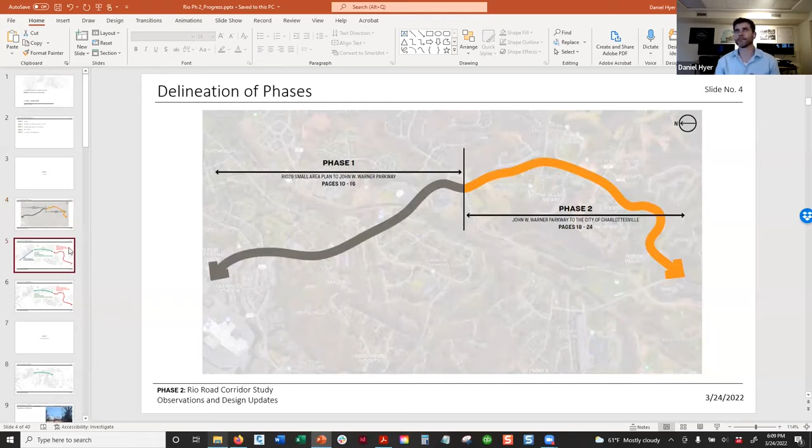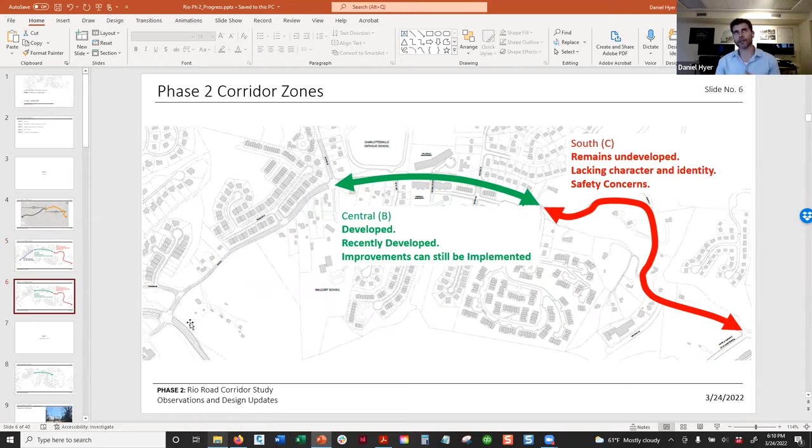Again, phase 2 is tonight. That's the orange part of this map. So that's from John Warner Parkway south to the city line. And within phase 2, we have organized the corridor into 3 zones: north, central, and south. This is just a brief recap of that organization. Tonight, we're talking about primarily central and south in terms of background data, but then we'll bring the north section back in when we talk about proposed concepts.

Since we last talked, we've done a deep dive into the central and southern portions of the corridor. There's a lot happening and there's a lot to talk about. We wanted to understand what's happening, what has happened, what will be happening. We wanted to identify deficiencies and safety concerns, and understand those so that our proposed solutions can address those items.

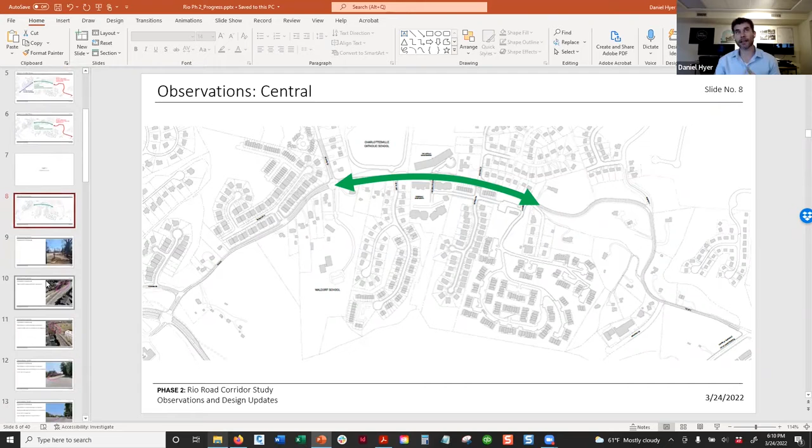I've gone with a slightly different format tonight in how I introduce that, going more photographic than anything, so you can see what I'm talking about.

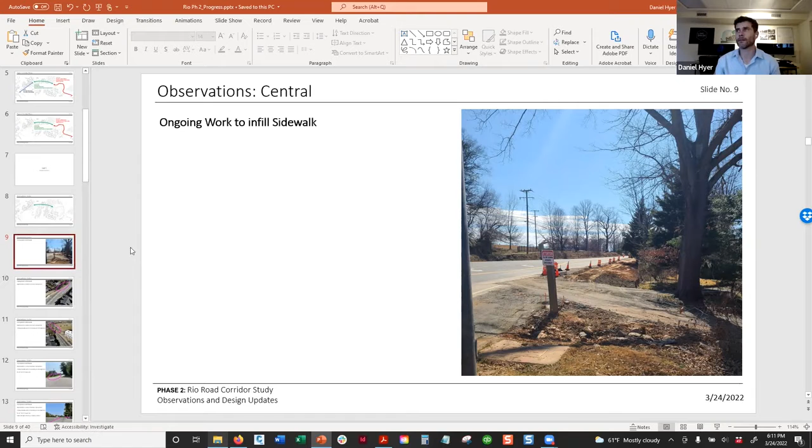Obviously, in the central section, like the north section, there's ongoing work. There's improvements happening. You've probably noticed this or been waiting in a longer queue of cars than normal as a construction flagger is out in the roadway. So there's work happening in the central section now, currently.

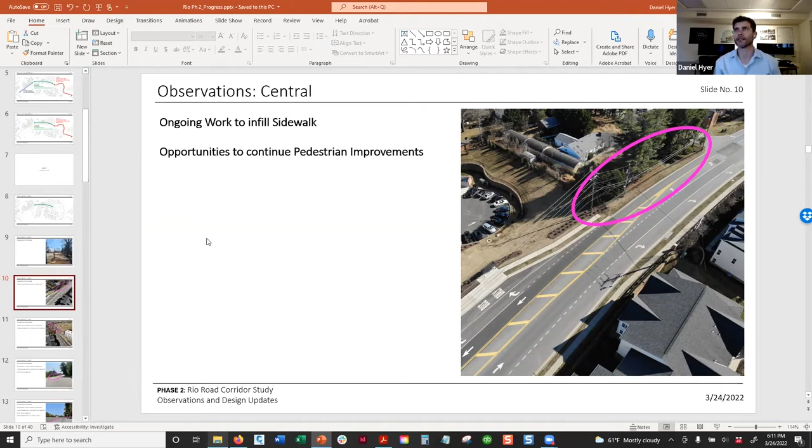But even though the county is currently infilling the sidewalk, even when they're done with that, there's still going to be portions of this part of the corridor that are still lacking just basic pedestrian amenities. We're getting better, but we still have work to do.

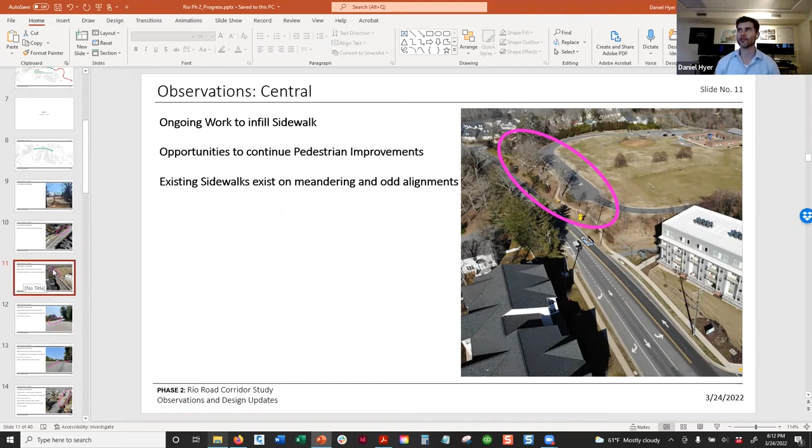Some of the pedestrian facilities we have specifically have weird alignments. If you recall the sidewalk in front of the Catholic school, we observed what's kind of a strange phenomenon with how the sidewalk meanders through the trees. Don't get me wrong, I think it's very lovely and nice, but it is an interesting attribute of this corridor. It's relatively atypical when you talk about pedestrian facilities within a public transportation corridor. So that's a unique item, and we're going to come back to that a little later.

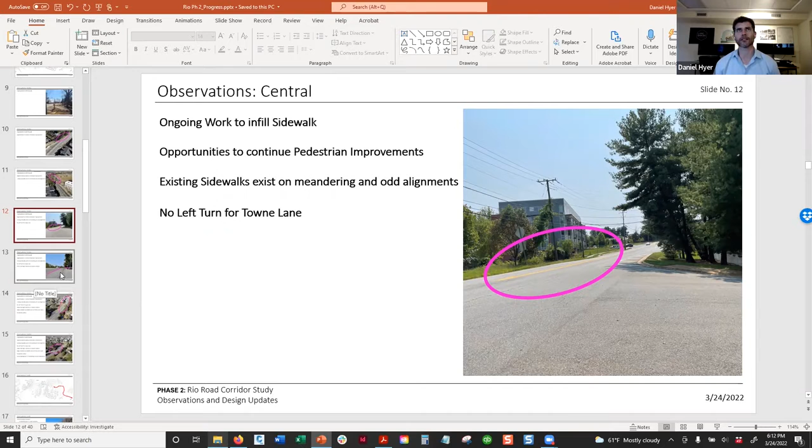Interestingly enough, there's not a left-hand turn at Towne Lane, which we think is an interesting attribute of the corridor, especially since there's so many turn lanes in the corridor, both right-hand and left-hand, and that this is just notably absent. We took note of that, and I do believe, though I might get this wrong, that a turn lane is warranted there, at least based on our initial assumptions and calculations. So there should be a left-hand turn lane at Towne Lane.

The central section is the first bit of the roadway where we've specifically identified some very quantifiable sight distance challenges, both on the vertical roadway line and horizontally. This car is shown here in this picture. If you've actually turned off of Penn Park Lane onto Rio, it is visually challenged. The sight distances are challenged and obstructed.

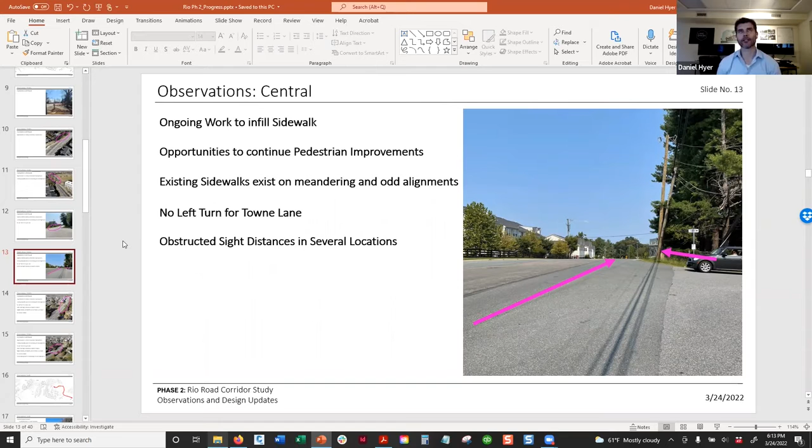Interestingly enough, the vertical geometry of the roadway also provides unique obstructions. There's a vertical curve here at this intersection, so the road has a curve like my hands are showing, and it's not the right vertical curvature for the speed limit of the roadway. So we'll come back to that as well.

Another very interesting attribute of the central section of this roadway is that the lane widths are highly variable. We're seeing a lot of inconsistencies with the widths available for vehicles to travel, which is an opportunity for us as we think about what we can fit into this roadway and what we should do with the space we have. In some ways it's a luxury to have some extra lane width, but we have lanes as wide as 14 feet next to lanes as narrow as 11 feet. So there's a disparity in how the asphalt is being organized and the space is being used.

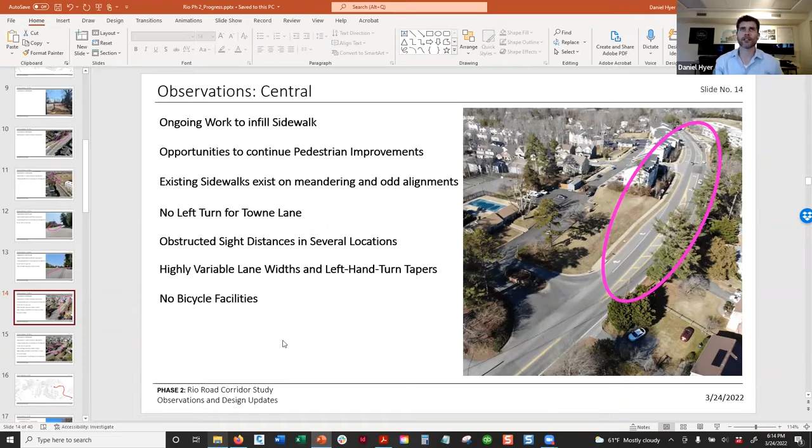It's also interesting to note that there are no bicycle facilities along this portion of the road.

Finally, here at the southern end of the central section, the entrances for Stonehenge and Rockbrook Drive pose a very interesting challenge in terms of access management and really safety for that matter. There's a number of accidents that have been recorded right here. If you're actually trying to know what's going on at that intersection—although it should be two intersections, but I'm just going to call it one ambiguous intersection—it's not hard to imagine that it's a little confusing what to do there. If you're a new driver, even an experienced driver, it's not exactly clear how vehicles should be interacting with each other at that intersection.

So those are just general observations of ours, or some of the most noteworthy ones of the central section of this corridor. I'm going to keep moving through my observations down into the southern portion of the corridor, and then we'll come back through everything.

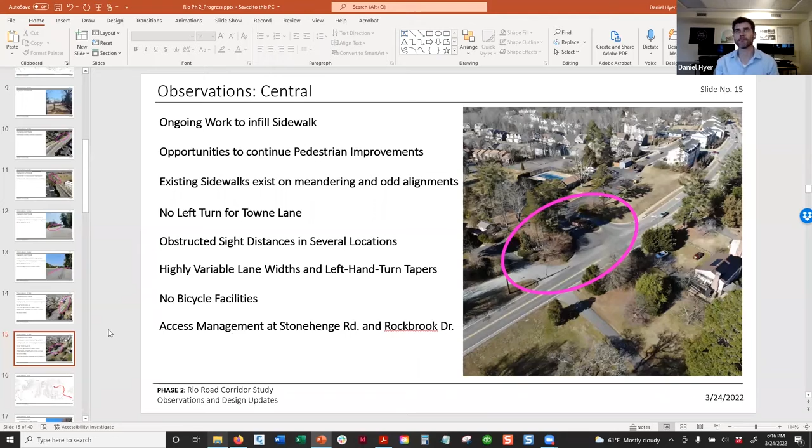The south section, this is really where it starts. If the central section is interesting, the southern becomes immensely interesting. There's just this almost unraveling of safety and predictability the further south you go on Rio Road.

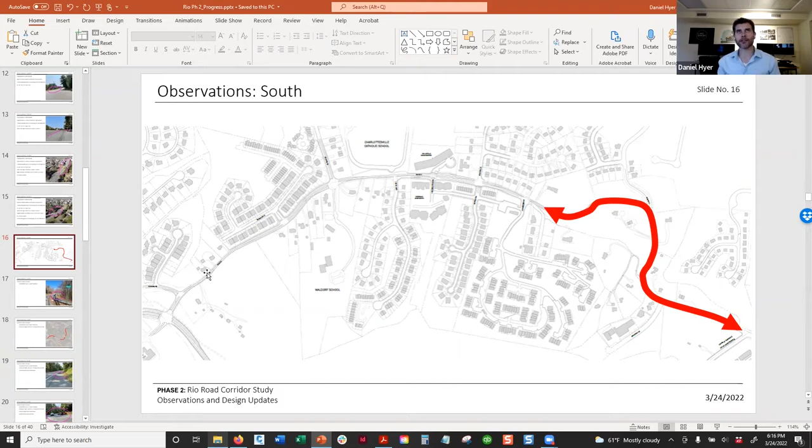Interesting to note, not only has the guardrail been hit some number of times in some number of locations along this portion of the roadway, the current guardrail is not up to current standards. We've observed that deficiency, and we'll be certainly making some comment about it. The guardrail's there because this roadway is more or less carved along a slope, so you have very constrained conditions on both sides of the roadway. Really any improvements you'd want to make are rather constrained on the transverse axis of the road.

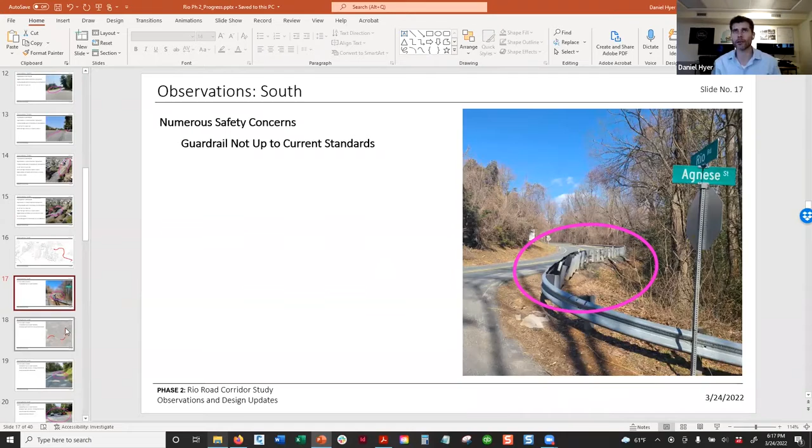Another interesting thing to note about this portion of the corridor is that a lot of these hairpin turns don't allow for adequate sight distance along the roadway. And that's further compounded as a result of the turning radii along these curves being too small for what the speed along this roadway is. And so you can start to see, and you're only going to see it more as I continue to go on, the challenges in the southern portion of this corridor start to just compound.

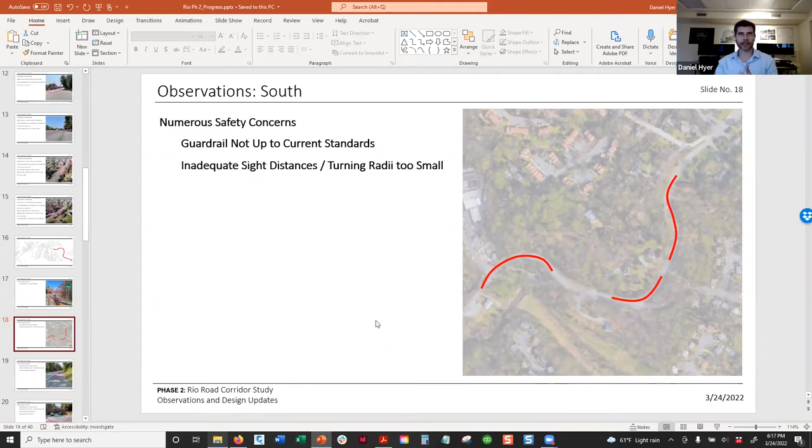So we have inadequate sight distance, we have turning radius too small, we have guardrails that are not up to current code. And then we start to have these strange spaces along the roadway where, and I know that all of you have experienced this, you have extra pavement that you're not even really sure why it's there, but it's there, and then there's vegetation growing into the road, and then there's drainage inlets occasionally, and there's a lot of cracking, potholes. It's just kind of this strange roadway shoulder, right?

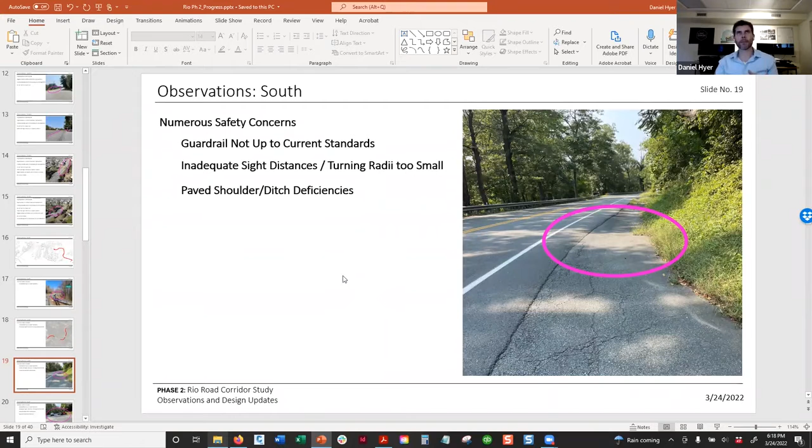And then I know everyone's probably experienced this. You see someone who wants to make a left-hand turn onto Agnese Street, which takes you into the city up to Locust Avenue. And because the pavement markings are lacking in their clarity, and because the roadway is sufficiently wide due to that paved shoulder we just looked at, you start to see cars doing things like that red truck is doing, where you have a car waiting to make a left-hand turn, but they can't see far enough down the roadway to see if the turn is clear.

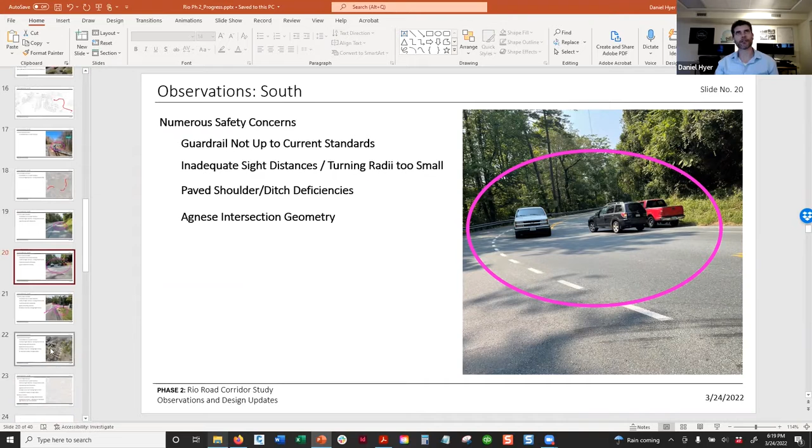So they continue to pull forward farther than they probably would just to see if they can get the sight distance for a safe turn. Meanwhile, in doing that, they've created a space for a car to go around them on the right, which is really driving on the shoulder or ditch or, you know, unintentional drivable surface. And so we see a lot of challenge here at this Agnese intersection because of all of these deficiencies. And the deficiencies continue along the road.

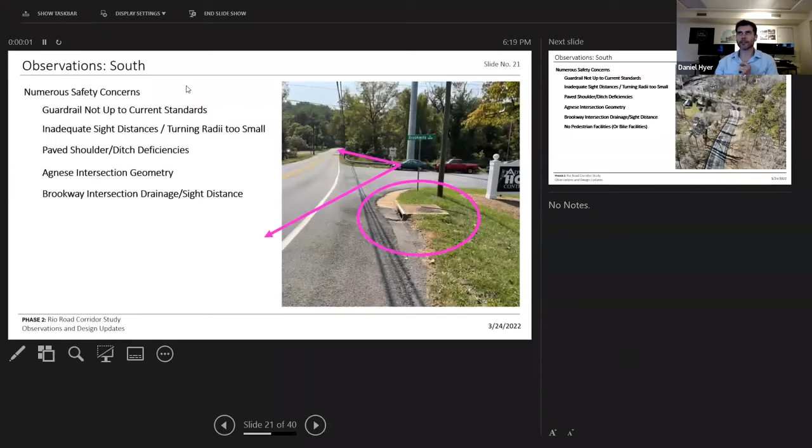Yeah, David. Yeah, I'm sorry. Sorry to interrupt your flow. Can you click on slideshow? It might be a little bit easier to see if the screen was bigger. I was thinking about that, David, but it kind of takes over. Oh, okay. PowerPoint punches me in the face when I try to do that. So okay. Well, I'm sorry. Then go ahead. Yeah. No, go ahead. If anyone is having trouble seeing things, I'll certainly come back and zoom in for you. I apologize if it's too small. And if you're watching on an iPhone, that's probably even harder yet.

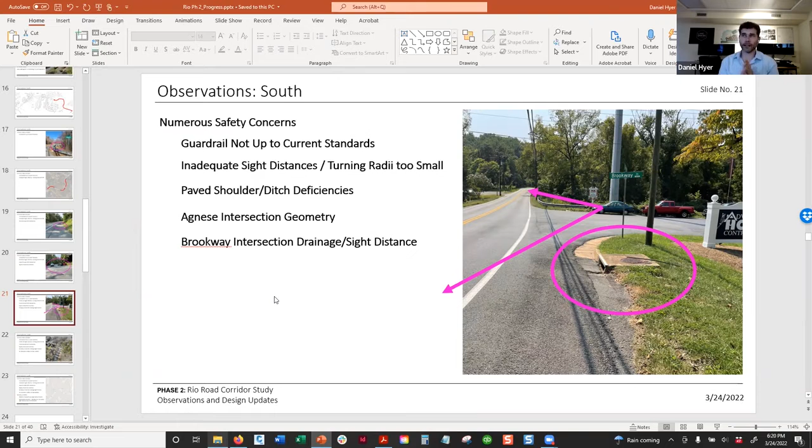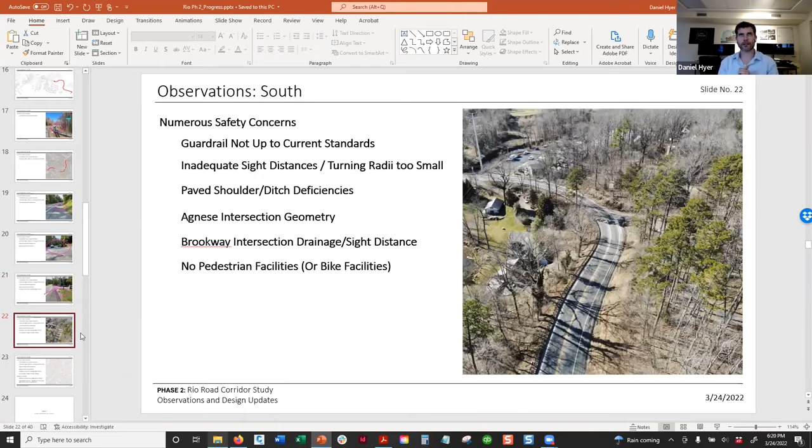So continuing on, Brookway Drive here, now we're getting down. We've come through the hairpin turns, you're out of your Grand Prix driving mode, but we still have challenges here at Brookway with drainage problems. There's been a number of accidents at this intersection, I believe citing rain conditions. So we're curious if that's correlating to drainage concerns, maybe hydroplaning. And furthermore, the sight distance is still challenged, right? That's becoming a recurring pattern. And then finally, there's no pedestrian facilities at all whatsoever on the southern portion of the roadway. Not surprising given everything I just described about it.

So to cap off, if you already weren't a fan of the southern portion of the roadway, then we have all of the accident data to share, and there's a number of accidents. We're actually working on an accident analysis to include in the document, simply because it's become very curious to us to understand what's actually happening because of all of these accidents here. And not accounting for the Melbourne Road intersection, which is a part of this corridor, the majority of the accidents here are single vehicle incidents, which is to suggest most likely that it's related to the road, right? It's not cars. Most of the accidents are single vehicle.

The driver has encountered some attribute of the road that has led them to hit the guardrail or go off the road. And when they're multi-vehicle accidents, the majority of them are in the southbound lane where they're traveling downhill, and where the southbound lane has the most constrained sight distances. And so that's where we're seeing those rear-ending accidents along the corridor. So in short summary, the south portion of Rio Road, really from Stonehenge to the city limits, has some severe safety challenges. And our recommendations for this portion of the roadway are going to largely deviate from what we've been doing elsewhere on the corridor into some more specific, nuanced recommendations.

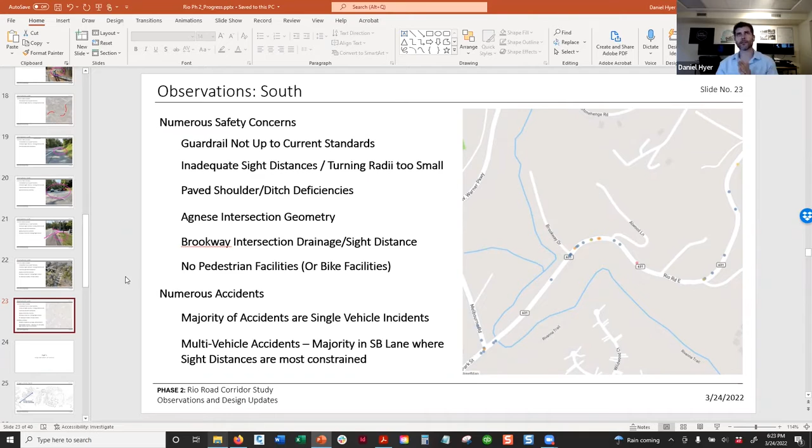So that's, in brief form, the summary of our general observations of the corridor. Now I want to begin to talk about some recommended solutions.

And I think I'm going to try to incorporate David Benish's comment here, because I think if I can get my screen a little bit larger, it will benefit everyone. So bear with me just a moment while I do that. Stop share, full screen. Sure. Okay. Hopefully that's a little larger for everybody. I'm gonna do my best to roll with the automation features in PowerPoint.

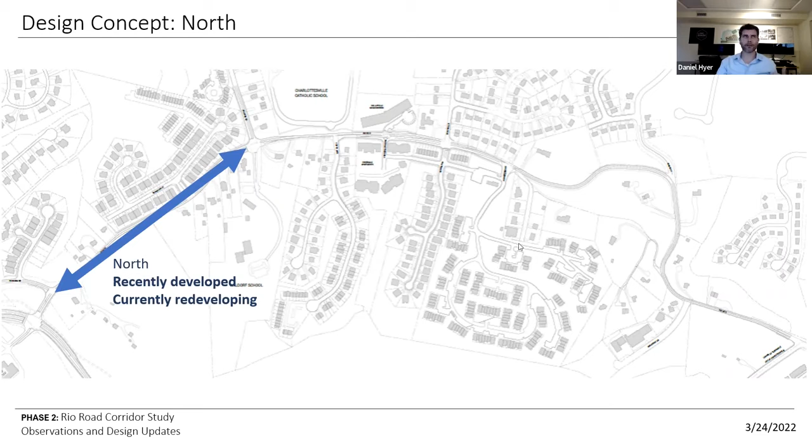Okay. So the northern section of the road. This is what we talked about in January, where we proposed some general framework ideas. We talked about our observations, and these are the alternatives we were thinking about last time. It was two. It was, should we just overhaul the typical section and allow the corridor to function relatively traditionally, and these new entrances to these new neighborhoods will be mostly full access?

Or should we basically propose another roundabout at Penn Park, where most people are recommended to make a right-hand turn out of their neighborhood and use one of the roundabouts to effectively make a U-turn? We talked about that. We heard people's feedback and observations and concerns.

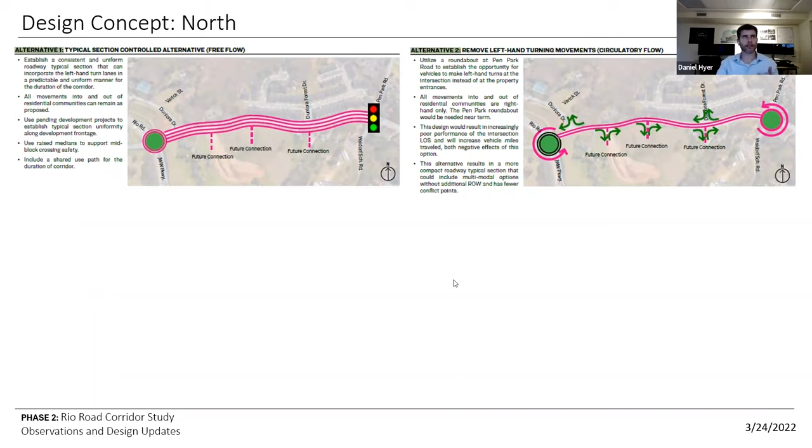And so our current recommendation is to do what was alternative one, to not inhibit the movements with right-hand turns only, but to really use these developments that are happening soon to help us build the corridor that we want. And with that corridor, we're trying to create the character of Rio Road East here. We're trying to integrate it with what's happening at the John Warner intersection. And we're trying to bring some additional

safety as well. And so with this current concept we have an overlay of the Rio Point development here on the south bottom of the page. You can see how that's going to fit into the corridor as a whole. So starting from the left and working to the right, you can see we're integrating with the VDOT established roundabout concept. And so the medians work together there to establish a uniformity coming off of the John Warner Rio intersection, and then this portion of Rio Road South.

We're glad to know that these developments are going to afford the opportunity for the shared use path to connect to the John Warner Parkway Trail, and really start to work that trail down toward Pen Park. And because all the developments are happening on the same side of the road, we have the opportunity to guide those developers based on this plan to build out this portion of the roadway with the shared use paths.

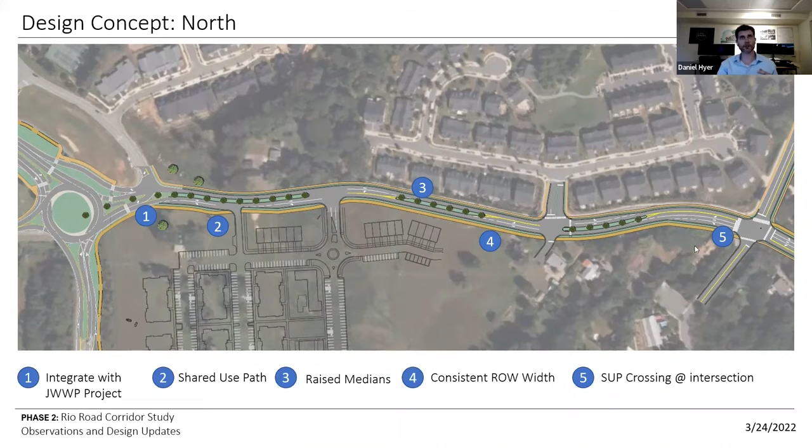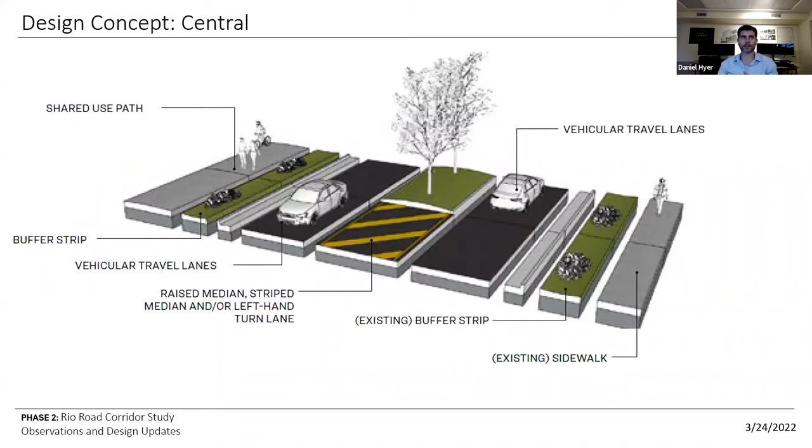If you can see, this is what the typical section through the north portion of the roadway will look like. Shared use path, if you're looking toward the John Warner Parkway intersection, shared use path on the left, and then the traditional sidewalk will be on the right, and then the roadway will be in between as shown here.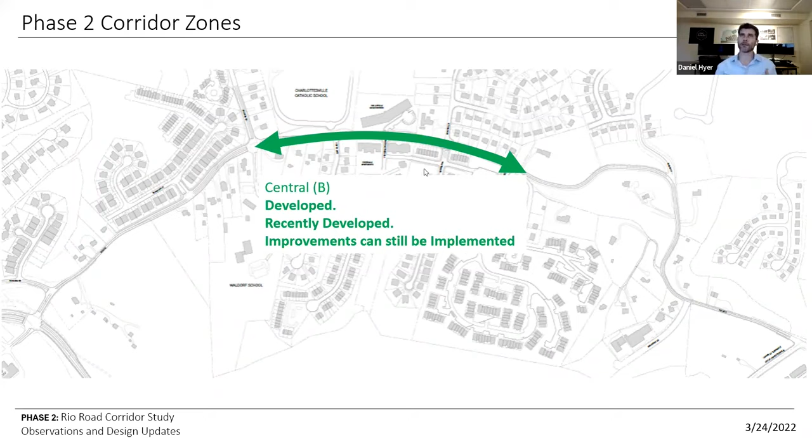Okay, moving to the central section. And so this is new. We're just going to kind of play off of what we introduced, some of the observations, earlier in this chat. So here is the corridor, central corridor, and then here is an overlay of our current concepts for the central section.

I want to introduce this by saying this is where our work is starting to become a little more infill and a little more nuanced. We're not proposing any intersection overhauls. We're really just trying to take all of those deficiencies that we noted and trying to resolve them, but also make it work in the context of the corridor as a whole.

Like I said, the shared use path will change sides at the signalized intersection, and now it'll be on the east side of the road. And that's allowing us to incorporate this meandering sidewalk that is current. The meandering that we see is, in my mind, more indicative of a shared use path than it is of a standard 5-foot sidewalk. And we're going to try to use that to continue the shared use path through this portion of the corridor, but now it's on the other side of the road, which is where the lofts is. And it's also providing opportunity for folks to get down into Penn Park.

And also, another logical connection to be thinking about for the county is Penn Park Lane, which is here by the red asterisks, where folks who might be walking or traveling by bike can go through Lochlyn Hill, use their new pedestrian bridge, and effectively get up to the Locust Avenue corridor to come into downtown Charlottesville. That would effectively let someone walking, jogging, biking, using a stroller, although a stroller would be challenging going up to Locust Avenue, but nonetheless, it's still probably preferable to navigating the south section of Rio Road.

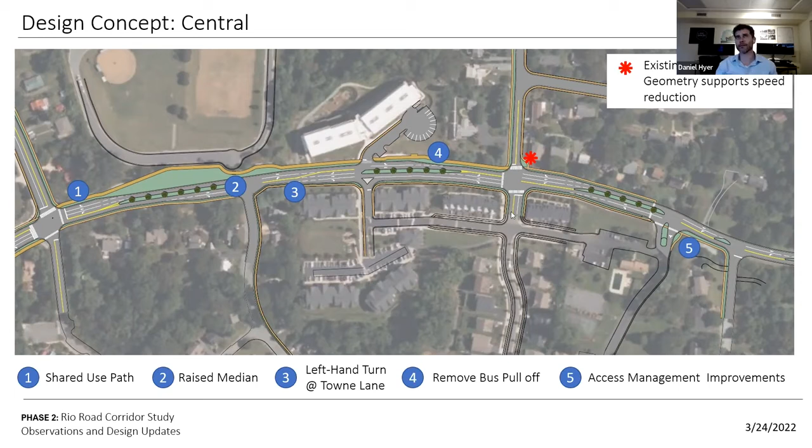And we think that discovery alone warrants the county and/or VDOT and/or us or whomever to really take up the banner that says the speed limit here should be lower. And it should be lower, really rallied around safety more than anything else. The typical section is the same as the north section, except the shared use path is now on the opposite side of the road.

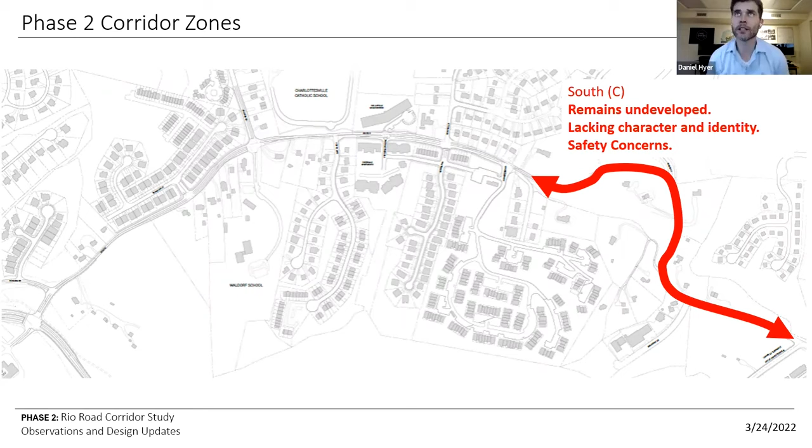And now the southern portion and our recommendations there. And here we're still working things out a little bit for ourselves because it's been so different than the rest of the corridor here on the southern portion. What we're really doing along the southern portion of the corridor, I'm going to skip ahead to here, is we're going to give the county basically a laundry list of safety improvements to make.

We'll still talk about pedestrian and bicycle connectivity, but it's hard to really talk about introducing people on bikes or walking into a roadway that is unsafe. And the work on the southern portion of the roadway is really basic safety improvements. And when those basic safety improvements have been made, then we can talk about really implementing multimodal transportation options.

But for now, there's a long laundry list of low-hanging fruit for safety improvements, as well as opportunities identified for the county to approach the city for some project sharing, because this intersection here, which is Agnese, which is that one where we showed the picture of the red truck going around the car, it's really a gateway into the city as much as it is a gateway into the county. And so we think there's a number of opportunities for the city and the county, hopefully, to have a positive discourse about what can be done there.

So we're kind of changing away from our, like, here's some recommended solutions, to here's a laundry list of improvements that need to be made. And as these improvements are made, as the safety of the road is improved, then we can begin to really think about the longer vision of bikes and peds.

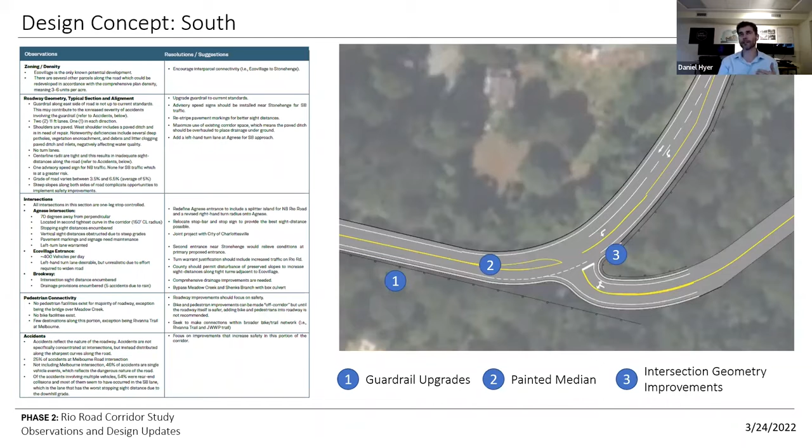Like I said, this has been so different for us that we're still kind of organizing our thoughts around how to present that, but it's probably going to look like 3 maps. One kind of very near-term improvements, one some mid-range improvements, and then some longer-range improvements, and really not talking about the long range until the near-term safety improvements have been made.

Okay, I'm almost done. Sorry, thank you for bearing with me. This has been a lot of talking.

So next steps, where we're going from here. We're working diligently to put a bow onto this document we've been talking to you all about for the better part of a year and a half, if not 2 years now. So tonight, I'd like to hear basically your feedback on what I've shared tonight. You can agree, you can disagree, you can offer feedback, thoughts, insights, whatever. We want to hear from you. General feedback, north, central, and south. It's all on the table.

We're going to continue to respond to that feedback over the next couple of weeks. And then we're going to meet some of you. I forgot to put it on here, but there's going to be an open house at the center. I think it's April 11th. And we'll be there to continue to dialogue here, really at that point, kind of help really put the polish on the document.

And then in mid-April, the document will be submitted to the county to then share it with the Planning Commission, I think, for their working session at the end of April. And then I think that the document itself should be mostly in its finished form, but with the opportunity to make some final revisions, I guess, before it goes to the Board of Supervisors.

So that's the road ahead, but you can see that this plane will be landing really between now and June. So this project will finish in this fiscal year for the county. Fiscal year turns over in July, so we'll be done before then.

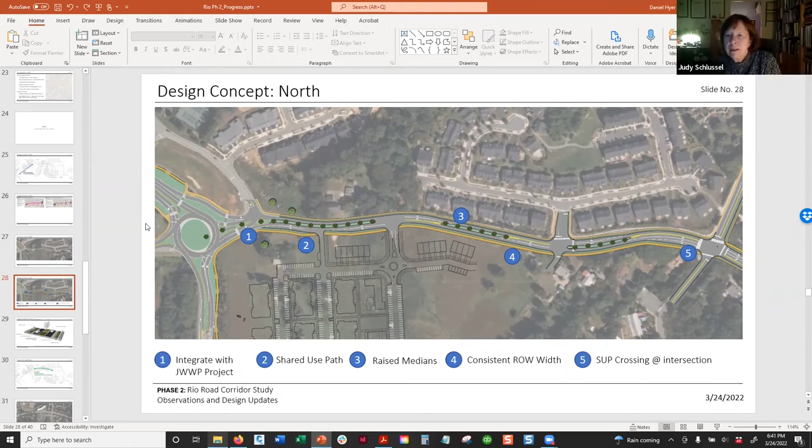I was just going to say, I really appreciate the amount of work that you all have put into this and analyzing what is a very peculiar stretch of road. And I want to say that I very much like the idea that you're putting forward of having a consistent look, feel, speed, configuration of going from the John Warner Parkway all the way to the entrance into Stonehenge. I think the idea of making that a consistent flow and a consistent look, using the medians, using the narrower lanes where we can do that, I think it's a good job. Thank you. Oh, well, thank you, Rick. Appreciate that.

I think I was going to say it's not too much of a surprise, Daniel, as I've driven up and down that road a lot. I could see a lot of the problems that you've identified. I do echo and support Rick's comments as well.